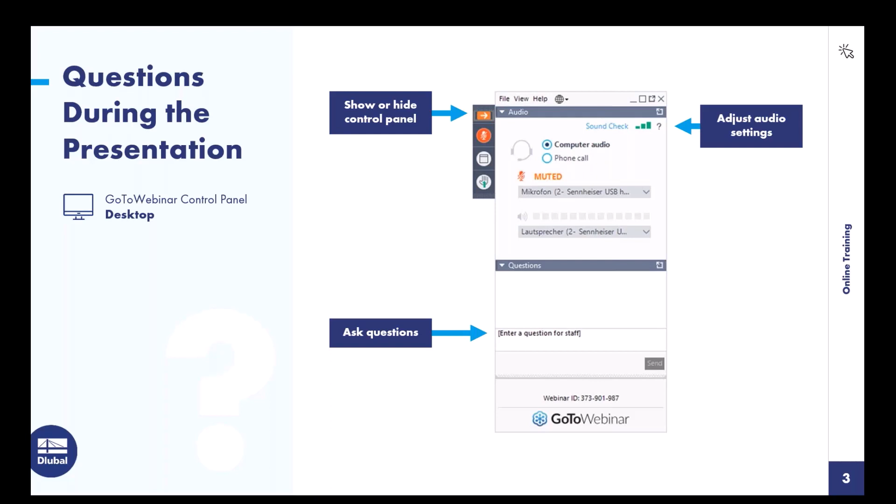I would now like to give you a brief overview of the training series. In today's training, you will receive an introduction to the strength of materials. This builds on the first training, which explained how internal forces are calculated. Today you will learn how cross-section values and stresses are calculated. In upcoming training courses, you will receive an introduction to finite element analysis and then an introduction to our design modules.

This brings me to today's training program. I will first give you an introduction to the RSECTION program. Using several examples, I would like to show you the modeling options and design methods in the program. On the first example, a thin-walled I-profile is modeled with graphic functions. I will model this slowly so you can enter this cross-section as well. In another example, I show how to insert cross-sections from the database and how you can add other parts to these cross-sections. Then I show modeling a massive cross-section based on a DXF template. Finally, I model a hybrid cross-section.

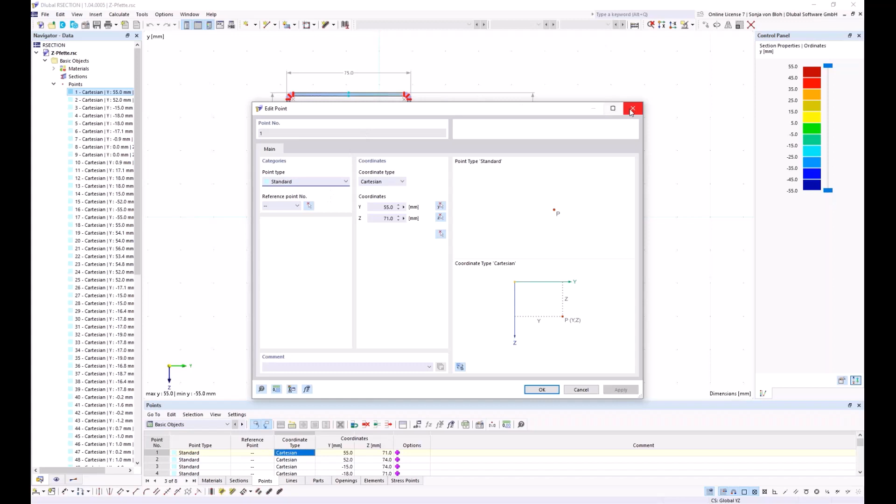It's also possible to open the dialogs for creating new objects. If I go to points, it's here possible to add a new point.

The display navigator, I will turn to this, controls the graphical display in the working window. If the checkbox in front of an entry is unchecked, this object is hidden in the graphic. If I uncheck the points here, you see in the graphic the points aren't displayed anymore.

The result navigator controls which results are displayed. You can change here between statical moments, unit stresses, and so on.

Then I would like to go into the mouse functions. To move the section, you can hold down the mouse wheel and move the section accordingly. You can turn the mouse wheel to zoom in or zoom out, and right-click opens the context menu.

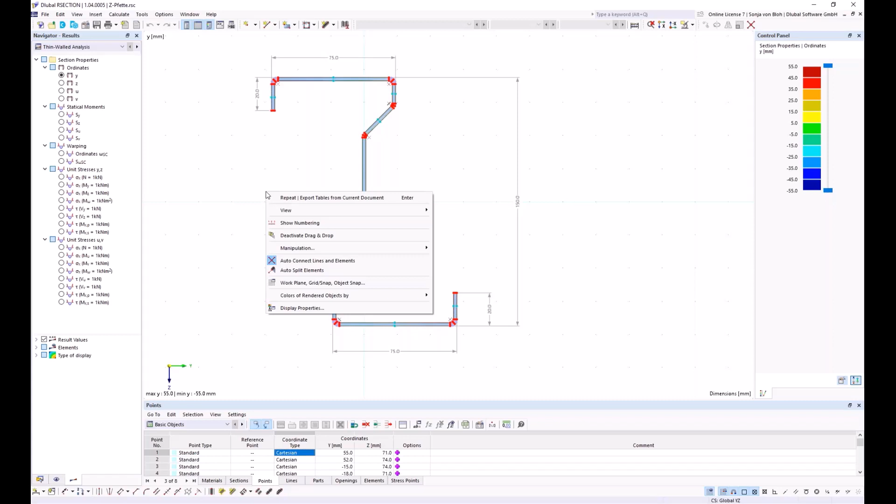You can also select objects with the mouse. If you open a window from left to right, everything that is completely within the selection area will be selected.

If you drag a window from right to left, everything that is intersected by the selection area will be selected. You can also select individual objects. To do this, left-click on an object that you want to select.

To add objects to the selection, hold down the Control key and then left-click on the next object you want to select. To remove objects from the selection, hold down the Shift key and click on the object you want to deselect. For the first part of the training, I am now starting a survey again.

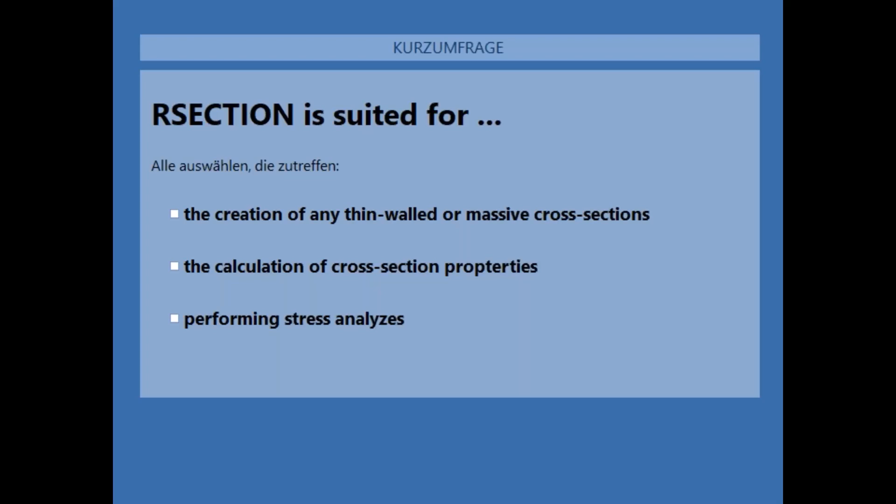All answers are correct. RSECTION is suited for the creation of any thin-walled or massive cross-section, and also for the calculation of cross-section properties and stresses.

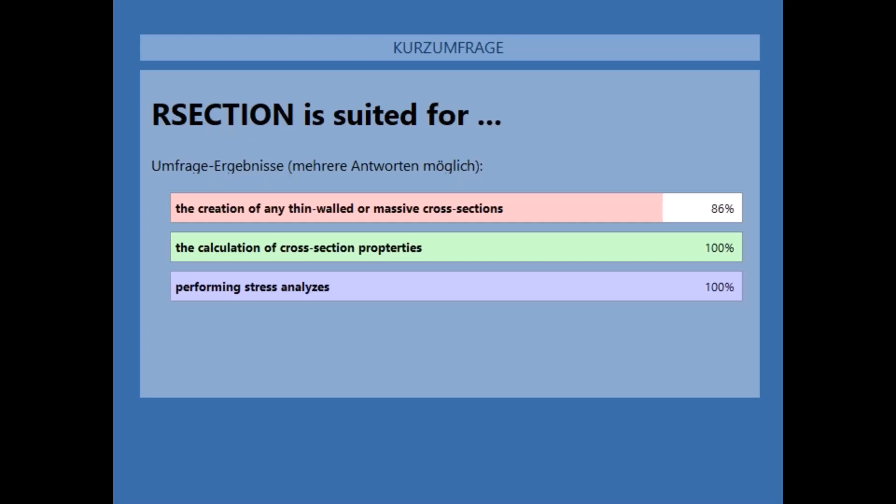This brings me to the first example. To create a custom cross-section, I open the new model window via this button here, and then I have to give the model a name, and I name it here example 1.

Furthermore, the analysis method must be defined. This is here in this chapter, and the following analysis methods are available: the finite element analysis and the thin-walled analysis.

The effective cross-section can be calculated for both analysis methods after activating the extension here under the options. A standard must be selected according to whose rules the individual parts, or the subpanels, are to be generated, and the effective cross-section is to be calculated.

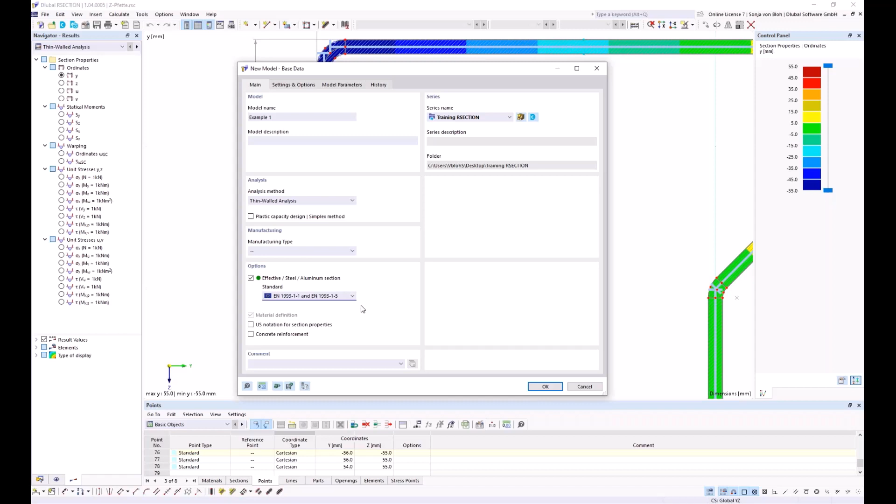The following standards are currently available: Eurocode 3 Part 1.1 for steel sections, Eurocode 3 Part 1.3 for cold formed sections, and Eurocode 9 for aluminum sections. I choose here the Eurocode 3 Part 1.1, and then I click on OK.

The selection of the design method or the standard is irrelevant when using the RSECTION cross-section in RFEM or RSTAB. You can select the design method in RFEM or RSTAB regardless of what is set in RSECTION. Furthermore, the subpanels are generated in the design modules based on the standard selected in the design add-on.

In the steel design add-on, the manufacturing type determines which part of the standard is used for the design. For cold formed cross-sections, the standard Eurocode 3 Part 1.3 is used, and for hot rolled or welded sections, the standard Eurocode 3 Part 1.1 is used.

Now the file is created. I first define the material, and for this I open the Edit Material window. I can create or copy another material on the list via this button. This creates a new material, and this copies the selected material.

I can enter a material name here directly. RSECTION then lists all materials that match that name. If I enter here S355, then RSECTION lists all materials with that name that are within this database.

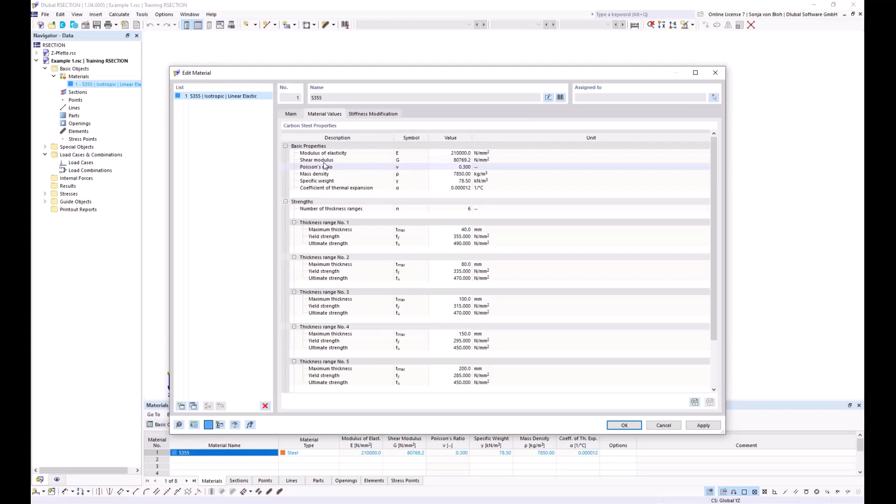If the material is not in the material library, I can create this material by activating the user-defined material option. I can adjust the material values of this type of material if I want to. I don't want to do this today, so I uncheck this option again. Then I click on OK.

I then create the elements. The definition of elements is required if the analysis method, analysis of thin-walled structures, is selected, or if the effective cross-section is to be calculated.

An element must always lie in an area. This area is called part in RSECTION. Elements can be created graphically or via a dialog.

The graphical input is called up via the symbol here in the toolbar, and the input via dialog is called up via the navigator data. If I go here, I can create a new element via the dialog.

When creating an element with graphical input, the part is also created. When creating an element via the dialog box, the parts and the points of the element must be created beforehand. This is why it's not possible here to call up this dialog, because I haven't created the points before.

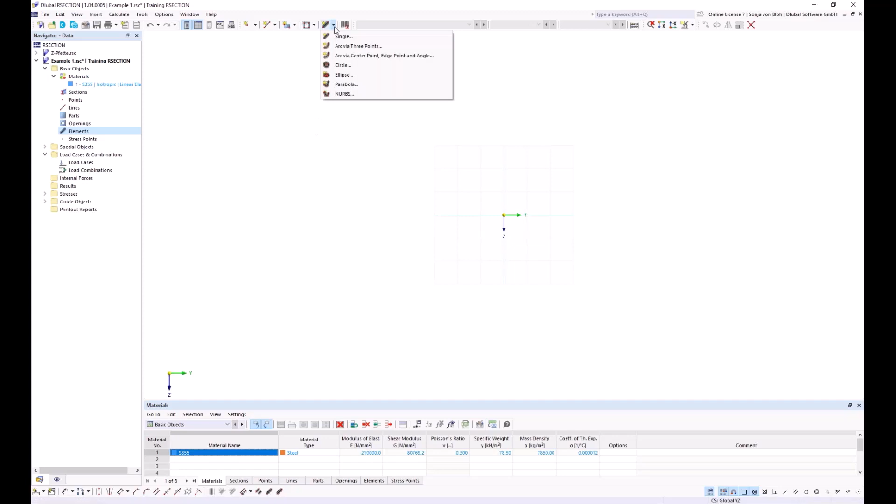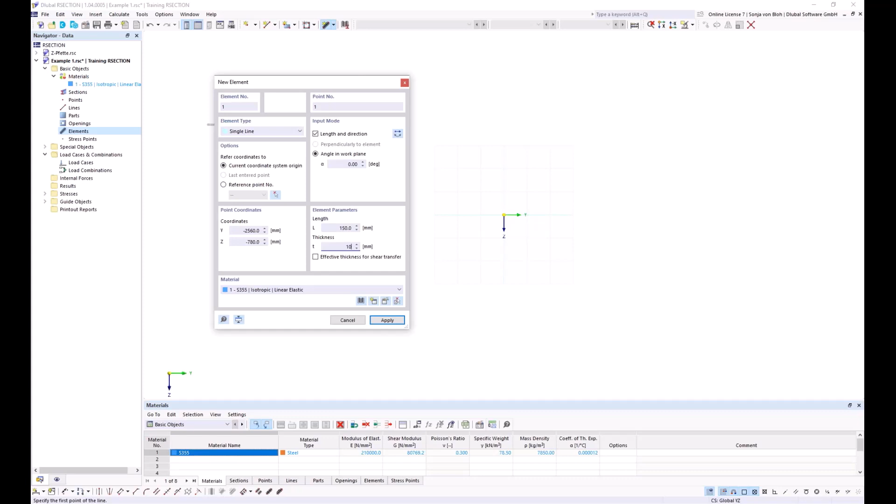I enter the element graphically, so I use this function single, and I enter the bottom flange here first. I choose the input mode length and direction, and I choose an angle on the work plane of 0 degrees, and I define for the flange a length of 150 millimeters and a thickness of 10.7 millimeters. Then I left-click here on the working window.

Then I create the web. Elements must be connected for the calculation of the effective cross-section. The connection is made via the start and end points of the elements. If two elements share the same points, they are connected.

For the web, I use the input mode length and direction, and define an angle in the work plane of about 90 degrees. I change the direction, then define the length of 289.3 millimeters and a thickness of 7.1 millimeters.

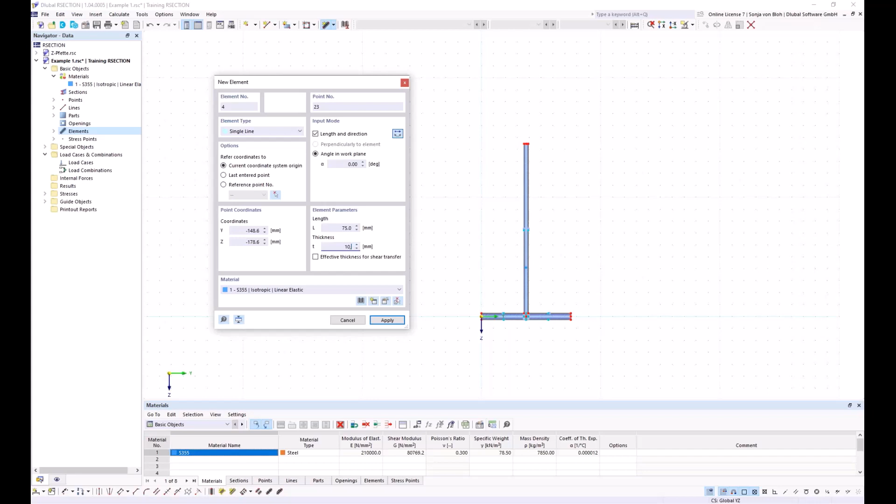I create this web. Then I create the left flange, also using the input mode length and direction. I change the angle on the work plane to 0 degrees, the length to 75 millimeters, and the thickness to 10.7 millimeters.

Now I have to create the flange on the right side. For this I reverse the direction, and then create this element. I now click on the right mouse button to close my window.

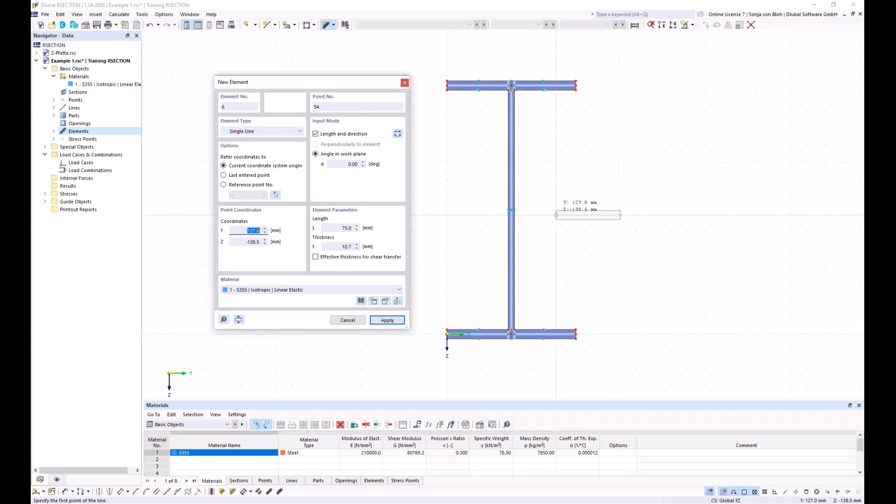The profile should be a rolled T profile to which a lower flange is welded. The round radius is 15 millimeters.

I can define lines to create them, or use the create round corner function, which I find here below. In this dialog I have to define the round radius, which should be 15 millimeters, and then click on the corresponding lines.

Then I click on the right mouse button to close this window. The lower flange is welded with a 6 millimeter double fillet weld.

I create the welds using the create angled corner function, which I find here. There are two corner types: both edges, where I can define the length of the edges, or edge and angle, where I can define just one length and an angle. You can also calculate directly in the dialog.

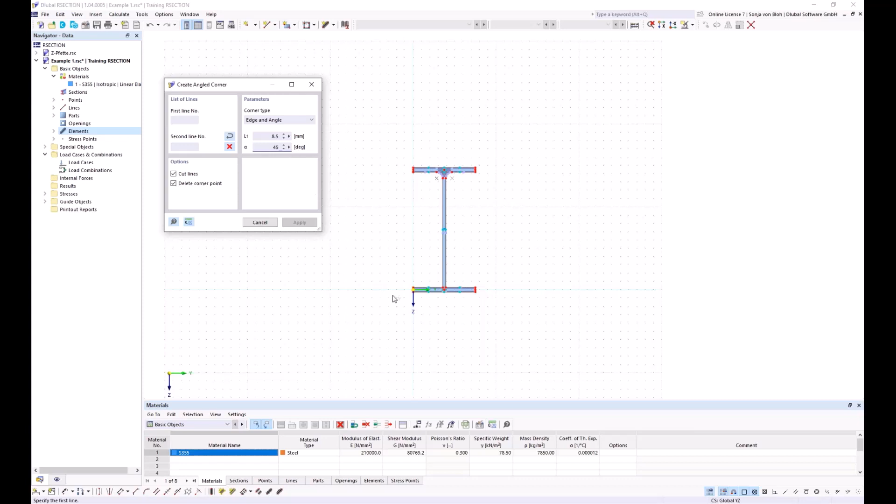So I define 6 multiplied by the square root of 2, and define an angle of about 45 degrees, and then click on the corresponding lines.

The subpanels you can see here are generated based on the standard selected in the base data; these cannot be changed. If no elements are defined, cross-section classification in the design modules of RFEM and RSTAB is not possible, and neither is a calculation of the effective cross-section. In the design add-ons, this cross-section is then designed according to cross-section class 3.

I would also like to use this example to show you how to calculate stresses and the effective cross-section. In order to calculate stresses or the effective cross-section, a load case must first be created. Load combinations can also be formed.

I create a load case first by going into the navigator data, right-clicking, and choosing new load case, which I name N. I want to create a second load case using this button, create new load case, and name it M. I also want to define a load combination.

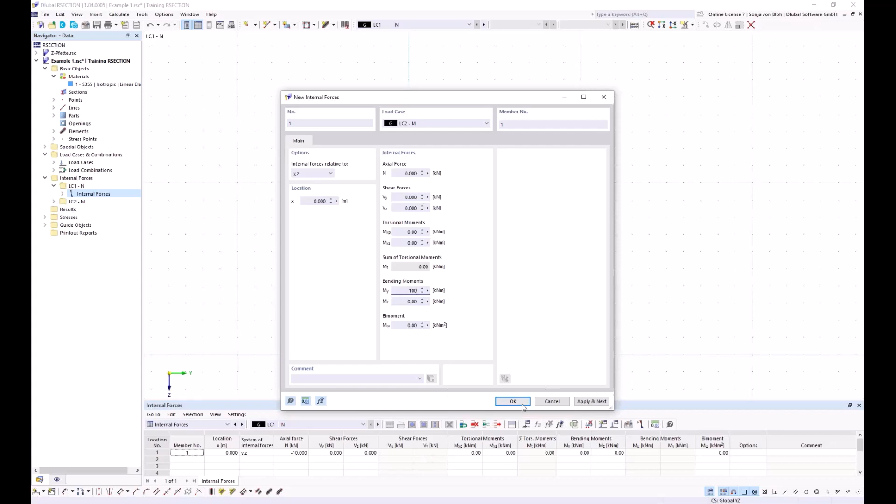And I click here on OK. The blue dots that you can see here on the graphic are the stress points. Stresses are calculated and displayed at the stress points. The stress points are generated automatically, but they can also be defined manually. I want to do that here.

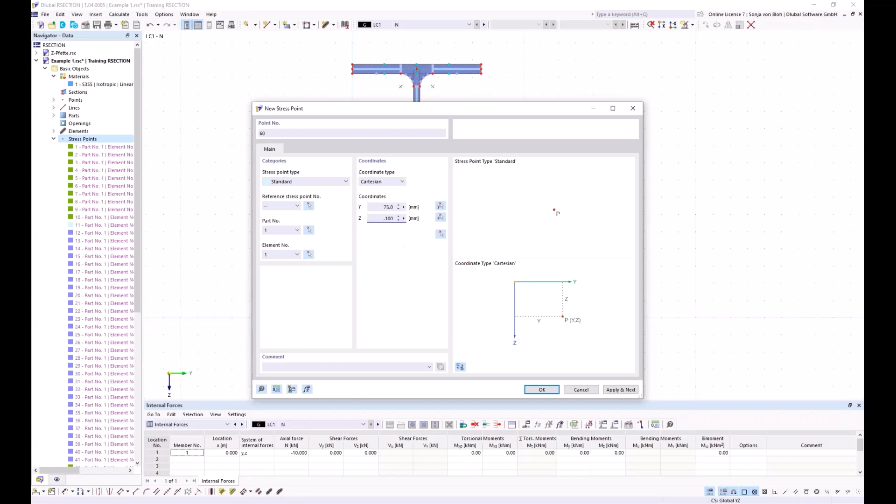So I go here to the navigator data again. I find here the stress points, right click on it, and define a new stress point. It's possible to define the coordinates manually, or to select a point in the graphic and import its coordinates. I define for the Y direction 75 millimeters, and for the Z direction -100 millimeters, then click OK. This stress point is now created. If I want to find it, I can right-click on the stress point in the navigator data and use the function find, and you see now the stress point is located here.

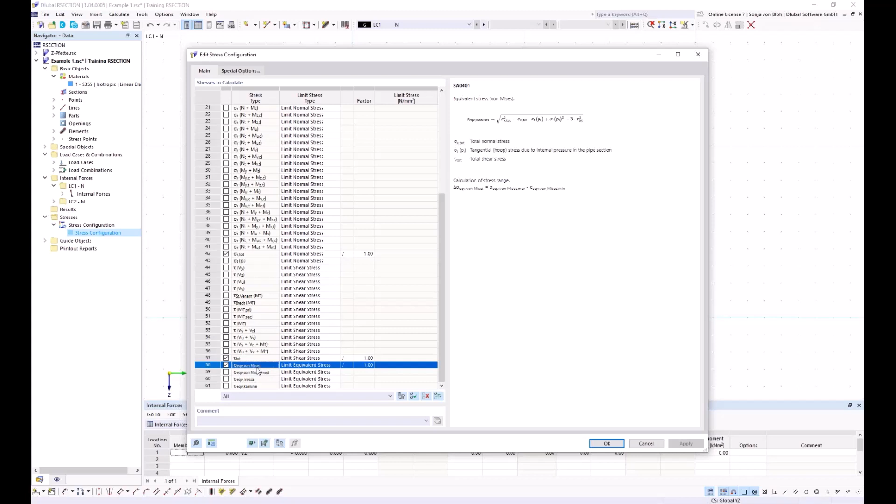Which stresses are to be calculated and output in tabular and graphical form can be set in the stress configuration, found also in the navigator data under stresses, stress configuration. If you double click on it, the corresponding window will open, and via these checkboxes you can check or uncheck the stresses you want to calculate. Here these stresses are calculated: the total normal stress, the total shear stress, and also the equivalent stress. I don't want to calculate more stresses, so I click on OK.

I'll start the calculation now. For this, I choose here in the menu Calculate All.

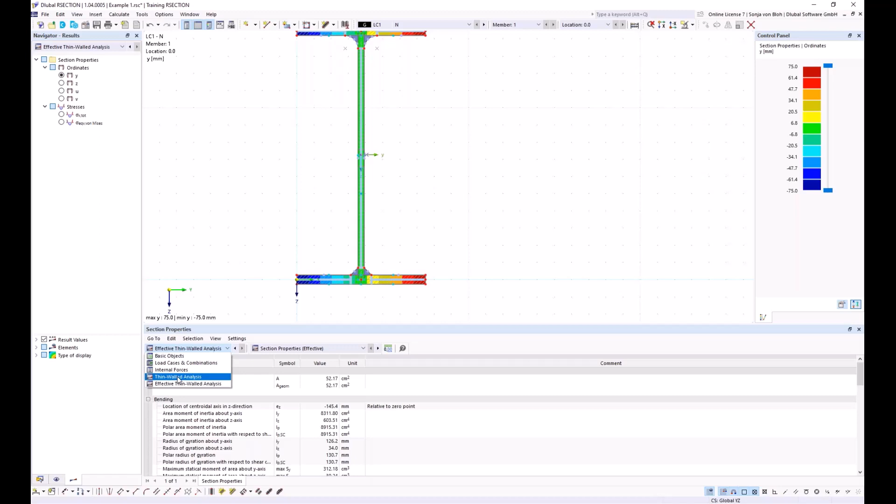In the result navigator, you can switch between the gross cross-section, this is here the thin-walled analysis, and the effective cross-section, this is here the effective thin-walled analysis. The same is possible in the result tables, where you can also switch between thin-walled analysis and effective thin-walled analysis. Furthermore, you can switch between the results of the individual load cases, and you can also display the stresses. Now the stresses sigma x total are shown for load case number 1. If you want to see the stresses for load case 2, you have to choose that load case here.

I first look at the results of the gross cross-section of load case N. The display type can also be set on the results navigator. Here you can change the type of display. I change here, I choose off. I can see the cross-section values here for the gross cross-section.

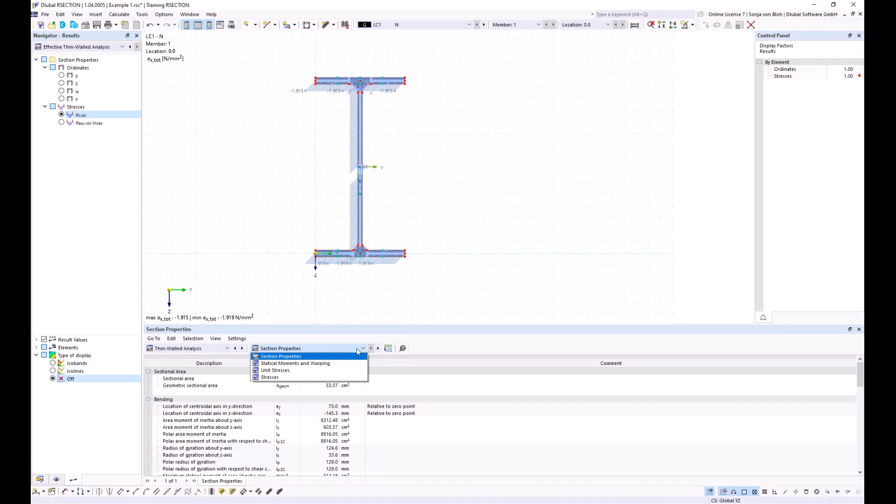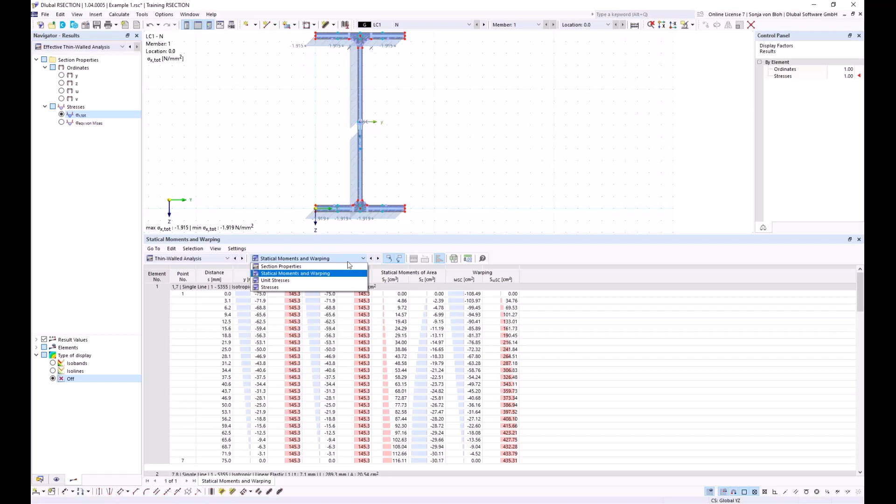If I choose here thin-walled analysis, then you can see the section properties. The section area is calculated, also the area moment of inertia about Y and Z axis, and so on. Also you can see here in the tables the statical moments, and it's possible to see the calculated stresses numerically. It's also possible to show these results graphically. You can see here the statical moments, and also the stresses on the gross section.

If I now want to display the stresses at a specific stress point, I have to switch here to the tab All Stresses by Stress Points. And if I choose here this stress point that I have created manually, then the results of the stress point are displayed here on the table.

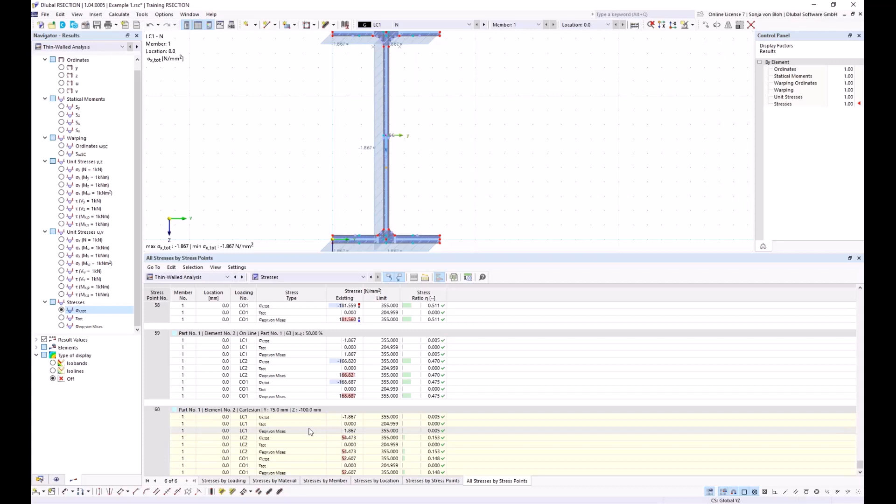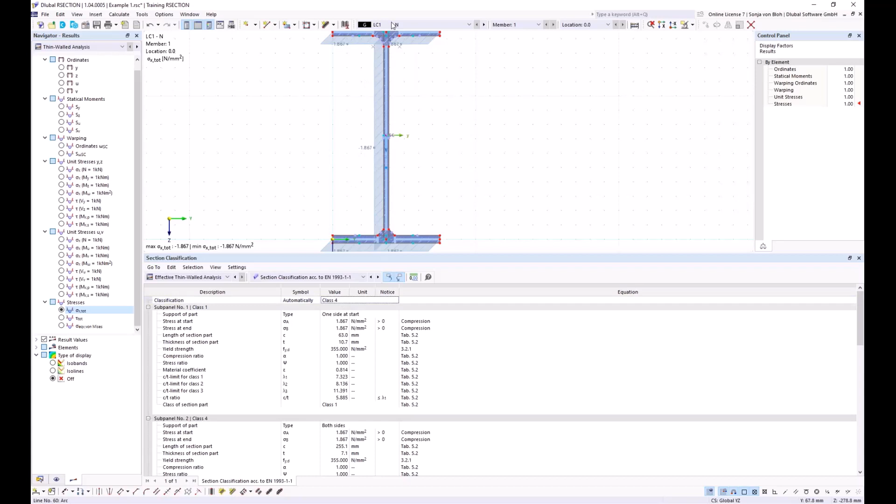In the case of the results of the effective cross-section, in addition to the results of the gross cross-section, there are also outputs for the classification of the cross-section and the effective width of the cross-section. I choose here the effective thin wall analysis. I have here the section properties of the effective cross-section, and here the section classification, and I see that the section falls into class 4 for this load case, axial force.

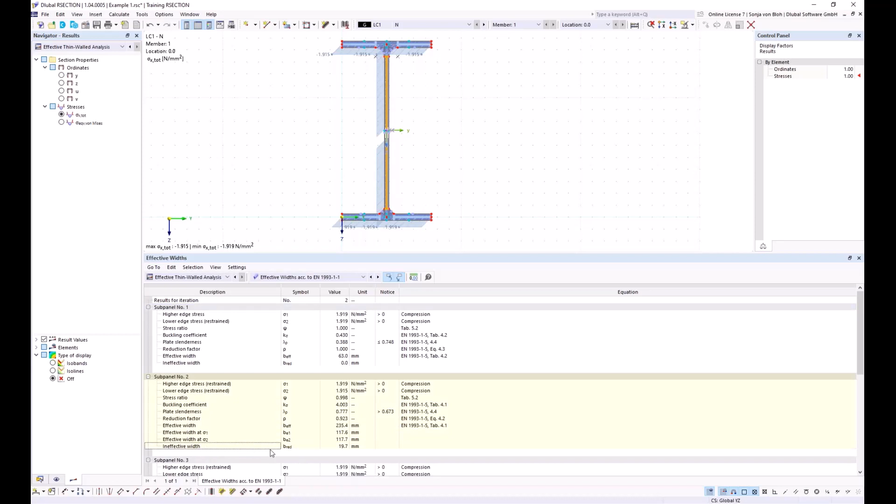Local buckling occurs in class 4 cross sections. According to the standard, the reduction in strength due to local buckling can be taken into account through effective widths, and you can see this here in the graphic. If I change here to effective thin walled cross section, then here the web falls into class 4, and therefore the effective widths are calculated. Here an ineffective width is calculated of about 19.7 millimeters, and you can see this reduction graphically.

It's also possible to look at the results of my load case 2. Then you can see that for my load case 2, this cross section falls into class 1, so no reduction is made.

I'm now starting a survey again regarding the requirements for cross-section classification. I start this. Multiple selection is also possible.

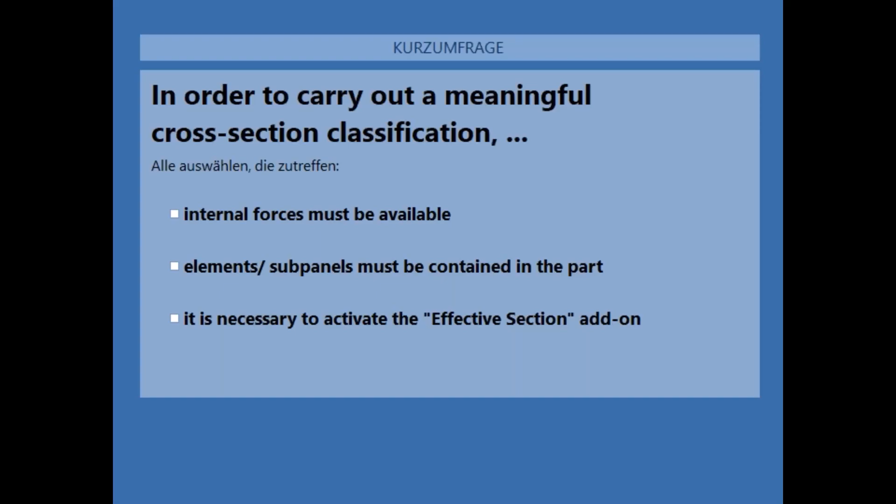Okay, I close the survey and then I share the results. All answers are correct. For a classification, internal forces must be defined, elements must be defined, and it's necessary to activate the effective section add-on.

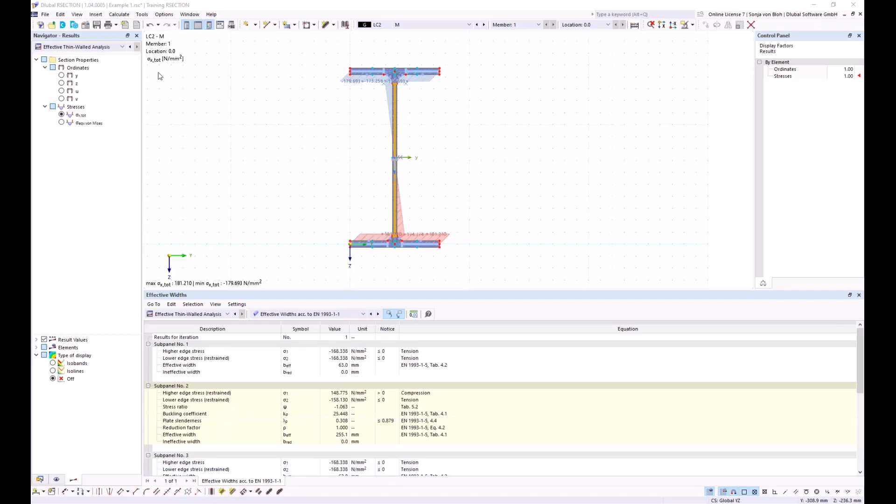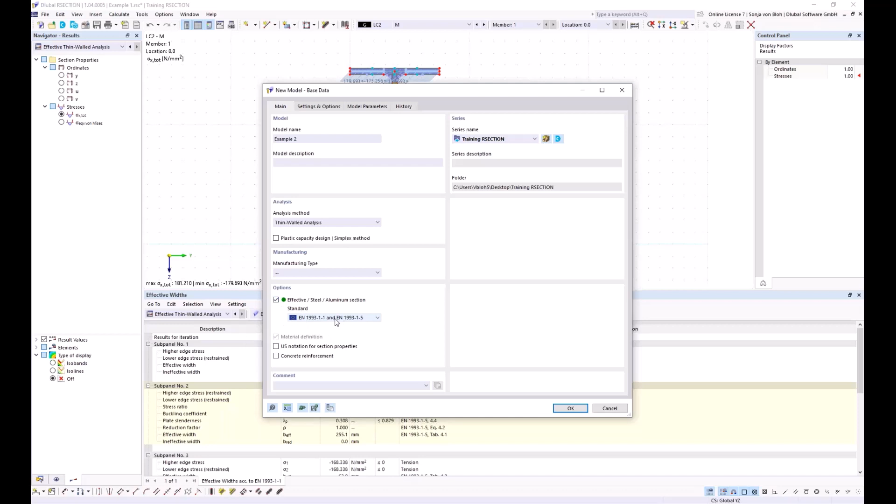I would now like to use another example to show you how you can access cross-sections from the library and modify them. For this, I create a new file. I click here on this button, New File, and I name it Example 2. I choose here the analysis method, thin-walled analysis, and I want to calculate also the effective cross-section. So I activate this checkbox again, and I choose here the Eurocode 3 Part 1.1. Then I click on OK.

Then I define the material. For this, I double-click on the material and I open the material database. And here I choose this S235. And here I click on OK. And now this material is defined.

And then I insert a cross-section from the cross-section library. To do this, I open here the new section and window in the data navigator. The window is structured like the material window. A cross-section can be created or copied via the list here. You can create a new section or you can copy selected sections.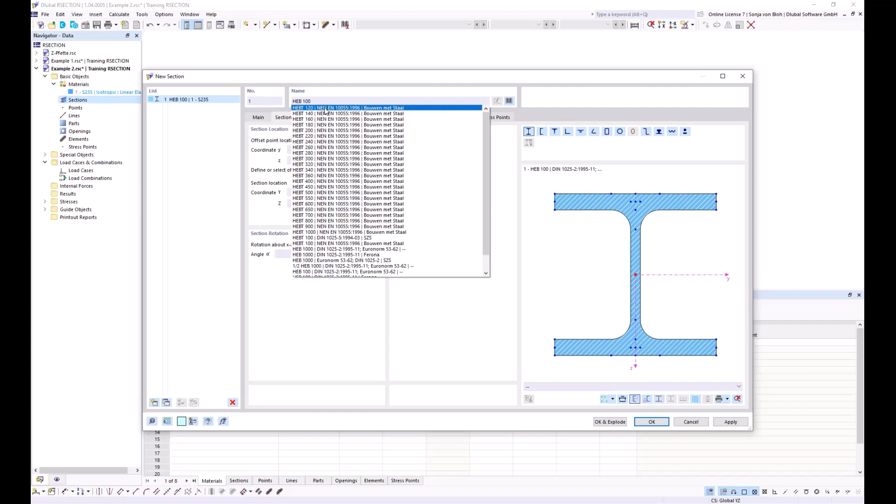I can also enter the name directly here, maybe HEB 100, and then you can see here all cross sections with that name in the cross section library. I can also open the cross-section library via this button here. A large number of cross-sections have already been entered into the cross-section library.

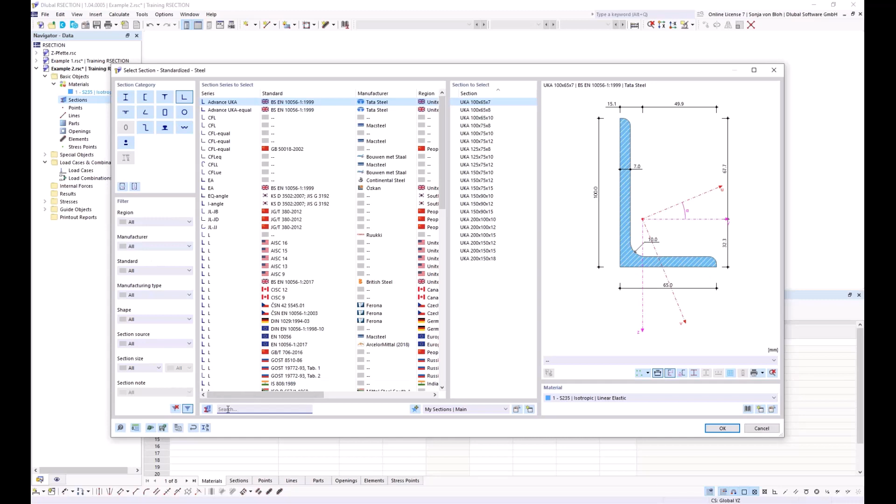I choose here standardized L cross-section. And in the cross-section library, like in the material library, I have filters here on the left or a search to quickly find the cross-section. I choose here an angle L 200 x 150 x 12, and I choose here this standard from DIN, and then I click here on OK.

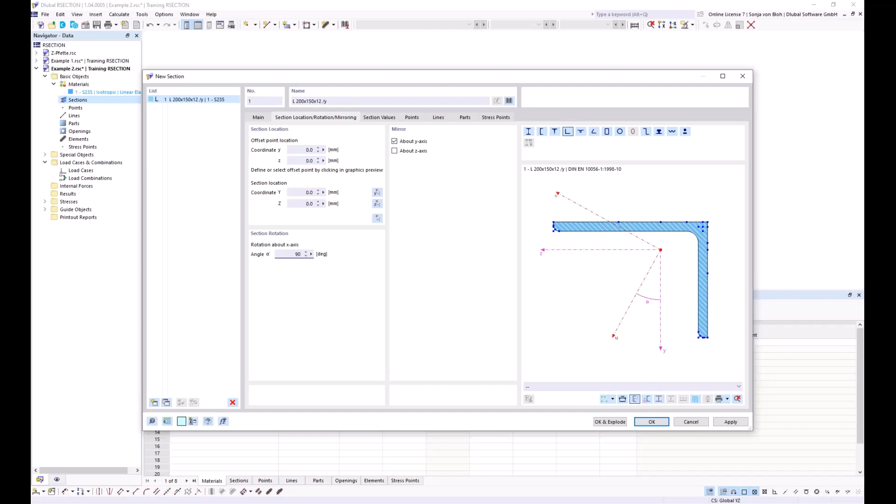The angle should be mirrored around the y-axis. That's why I activate this checkbox, and the angle should be also rotated about the x-axis about 90 degrees. So I define here 90 degrees. Furthermore, I select the offset point in the graphic, and here I select this point, and at this point the cross section is placed at the insertion point that you can enter here. You can enter it manually, or it's also possible to pick the location in the working window. And I pick here this location, and then I click on OK.

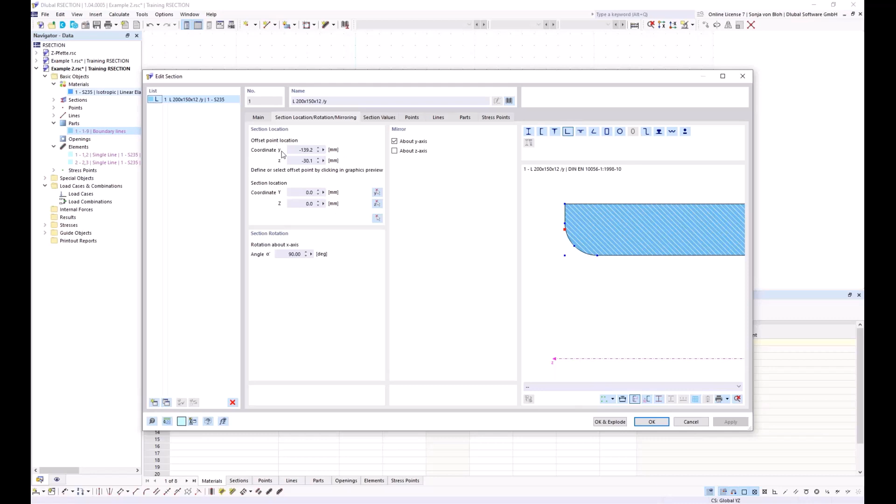When inserting this thin-walled cross-section, two elements are created, and also the corresponding part. The cross-section can be subsequently edited. If I double-click here, this opens the Edit Section dialog where I can change or modify here the offset point locations and so on. And it's also possible to move this cross-section or to rotate this cross-section via this function here.

However, in order to modify individual objects such as points or lines, the cross-section must be split. The cross-section is to be supplemented by further cross-section parts. I therefore split the cross-section into its individual parts, and I can do this by right-clicking on the section, and then I choose here this function explode.

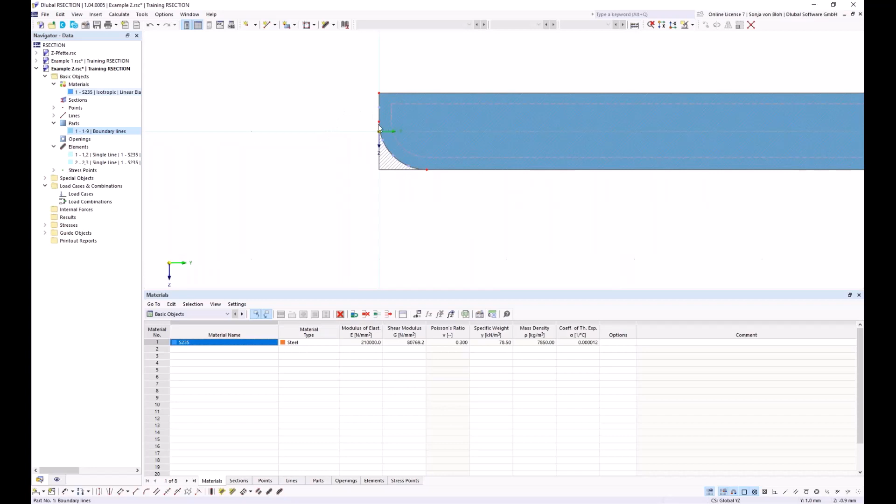The fillet isn't needed, so I will delete that. I delete this point, and now the part is deleted too. Here you can see the elements are colored in red, and this means there's an error for this element. The elements must lie in a part. The part is deleted, so here's an error, but I will create this part later.

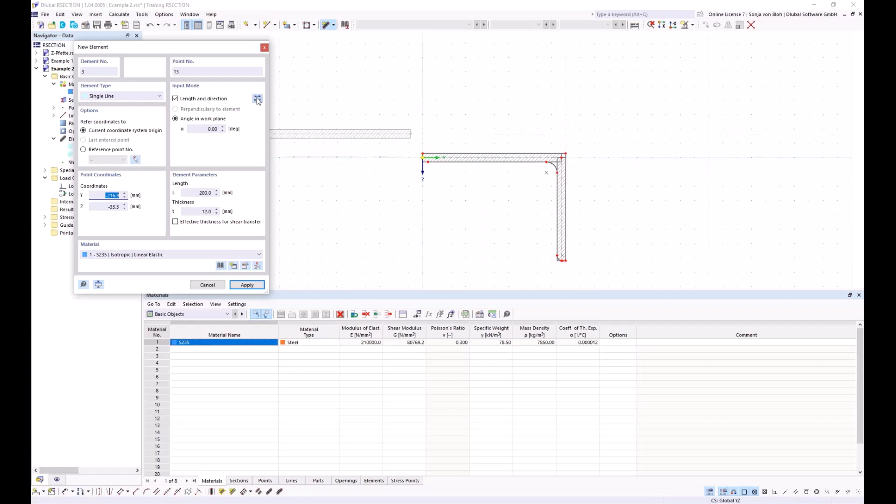I will now add more elements, and I will do this via the graphical input. So I select here a single element, and I use also the input mode length and direction. Angle in the work plane is 0 degrees, and I define here a length of 200 millimeters and a thickness of 12 millimeters. Now the direction must be changed, so I click here on reverse orientation, and then I click here on this point. Another element for the web should be created.

To do this, I use also the input mode length and direction. Here I define an angle of 90 degrees, and I have to reverse the orientation, and the length should be 400 millimeters and the thickness 10 millimeters. And then I click here on this point.

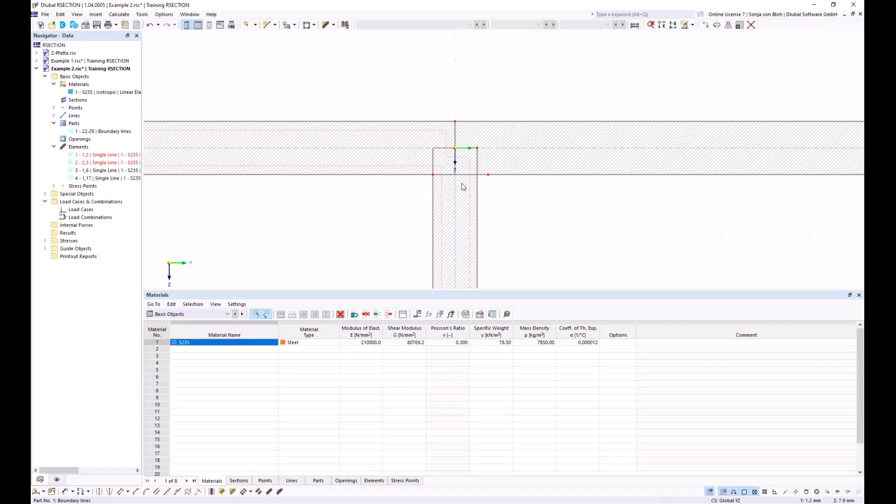I delete unnecessary lines. For this, I click with my left mouse button on this line, and then I click on delete. And I will do this with this line also. I select it, then I click on delete.

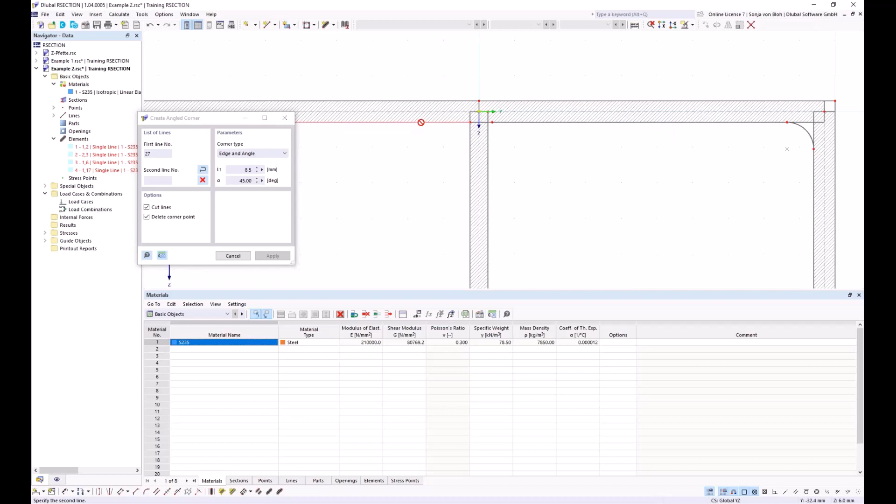Welding seams should be also taken into account in the cross-section properties. I create the weld using the angled corner function. So I open this dialog again. I choose the corner type, edge and angle, and a 6 millimeter double fillet weld is to be defined, so that I define here 6 multiplied by square root of 2, and I define here an angle of about 45 degrees, and then I click on the corresponding lines.

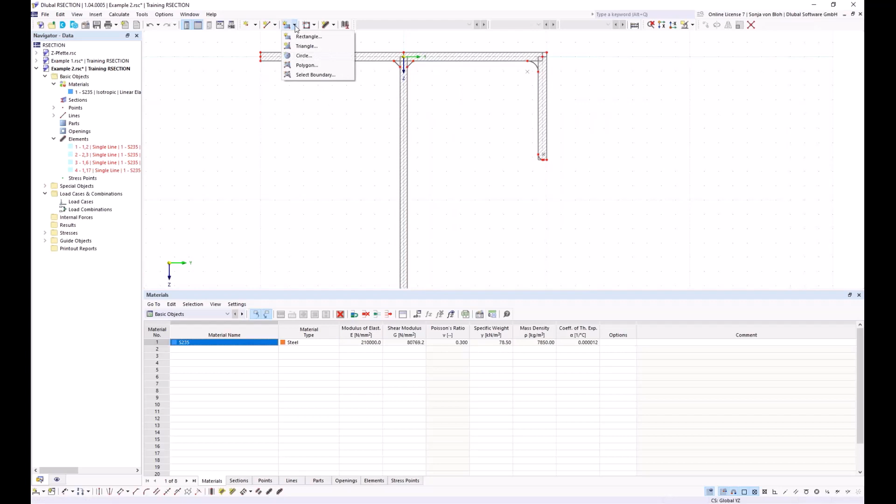Furthermore, I still have to create the part, and I will do this using a function that I can find here: select boundary. For the new part, I have to define a material. This should be the created material, S235. Then I click OK, click on a line, and now the part is created. The cross section is now complete.

I would now like to calculate the effective cross section and the stresses, so I create load cases and internal forces. I create the load cases first. For this, I go to the navigator data and choose new load case. I name this load case N, and I create another load case via this button, create new load case, and name it load case M.

I also create a load combination. For this, I go to the tab load combinations, click on create new load combination, and then I add all load cases to my load combination. Then I click on OK.

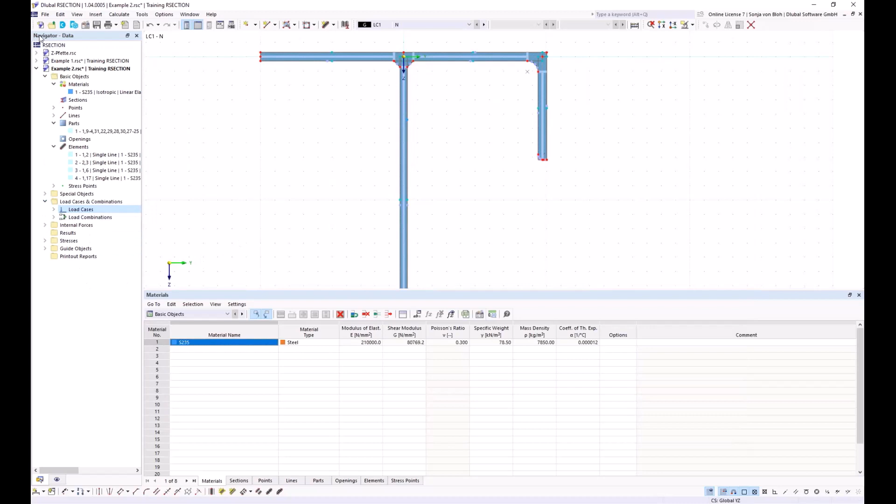Then I have to define the internal forces. To do this, I go to the navigator data, open internal forces, and then I define here an axial force of minus 50 kilonewton. I click on apply and next.

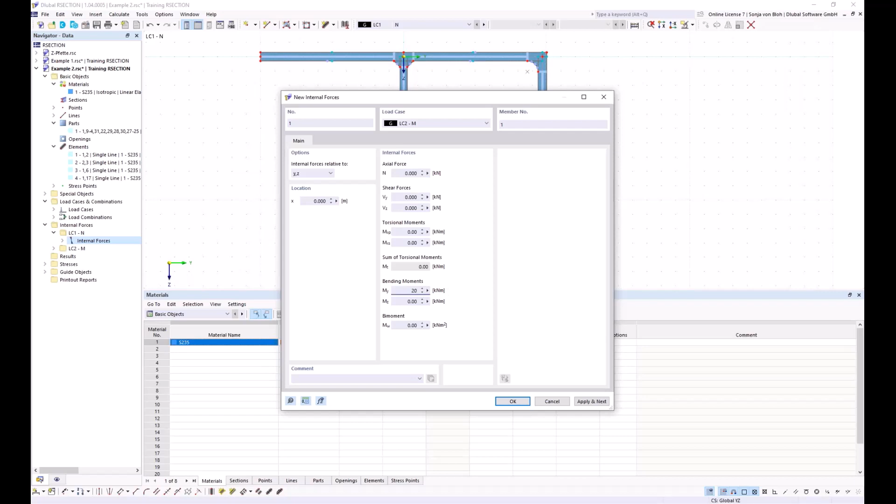I change the load case to load case 2. I define here an axial force of 0 kilonewton and a bending moment of 20 kilonewton meter. And then I click on OK.

Then I start the calculation. I choose calculate all, and I look at my effective cross-section. This cross-section falls in load case 1, also in class 4. I can see the reduction here, and I can see the reduction also in the tables. I can see the section classification, class 4, and the effective width for this sub-panel.

I also want to create a printout report, and I will do this via the navigator data, where you find printout reports. Then I click on new printout report, and I have to check the report items that I want to add into my printout report. I don't want to see the stresses by material, by member or location, and stress points. Then I click on Save and Show.

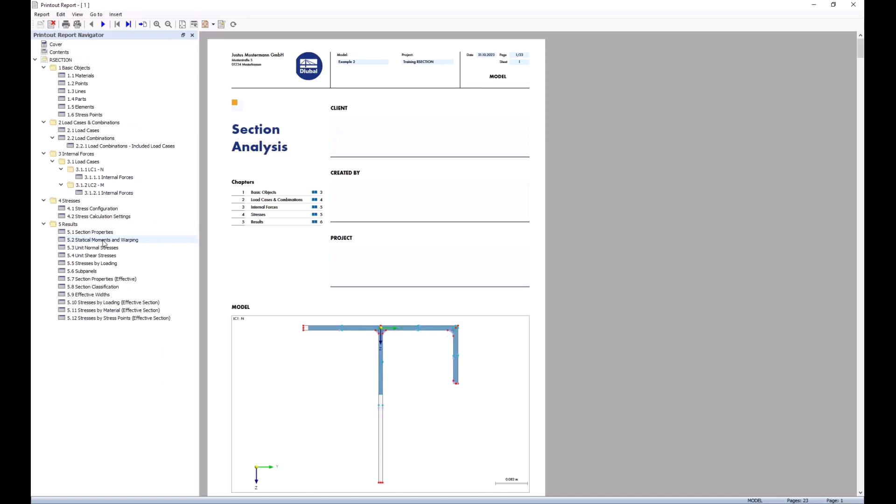Now the printout report will be created. I can see here the numerical results. It's also possible to add graphics to the printout report.

To do this, I hide this printout report, and I use this function, print graphics to the printout report. In this window, it's possible to define the size of the graphic. Here I choose window filling. I can see now the preview, and if it's okay, I can click on Save and Show. Now this graphic is added to the printout report.

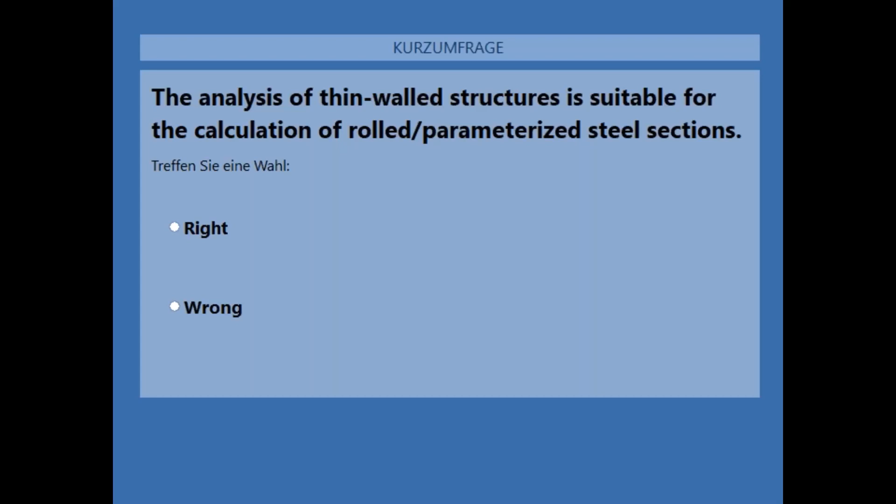I will now close the survey and share the results. The correct answer is that the analysis of thin-walled structures is suitable for the calculation of rolled/parameterized steel sections, and you have answered this correctly.

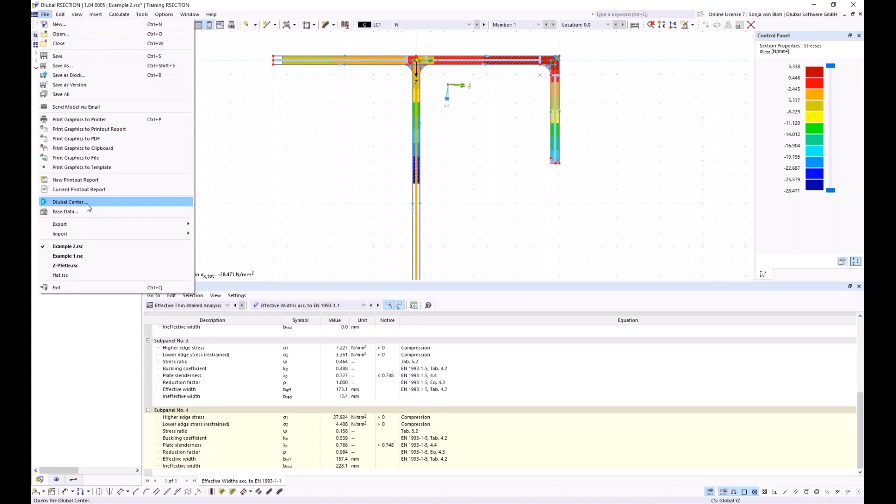In the next example, I would like to show you that you can also create cross-sections by importing a DXF file. A DXF file can be imported via menu File, Import DXF. Then I have to choose the corresponding DXF file, and then I click here on Open.

I don't want to import the DXF file into the active model. I want to create a new one, so I click on No. And then a new window opens.

In the section Create RSECTION Model, you have 3 options for creating the cross-section. The automatic creation of elements is useful if the outlines of the cross-sections are available in the DXF file. RSECTION attempts to create center lines for parallel lines and then set the elements between the intersections. Only elements that do not exceed the maximum thickness that you can define here are created.

The import function, use DXF template lines as center lines, is useful if the cross-section geometry is available as a center line model. The lines of the DXF template are considered as the center lines of the elements. The thickness defined in the field T is assigned equally to all elements.

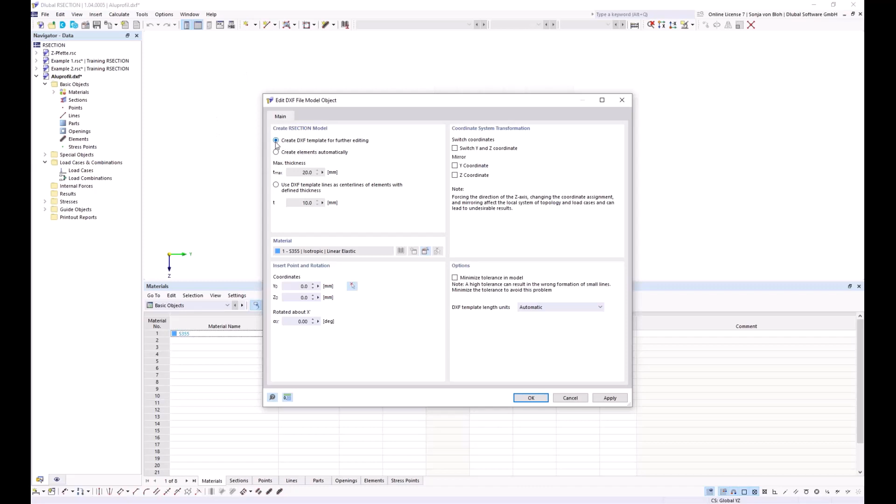You can then use these lines as an aid for modeling. I choose this option now, and then I click on OK, and now the lines are created.

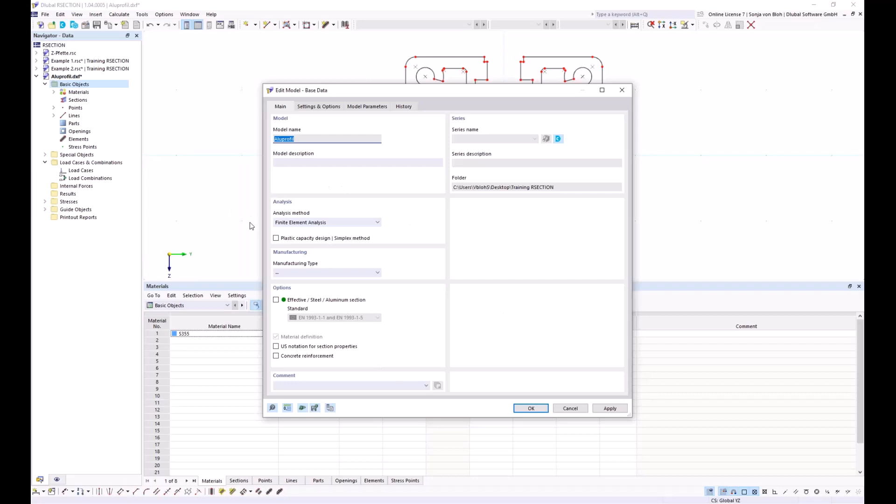A finite element analysis is to be carried out. To do this, I go to the base data and choose the analysis method, finite element analysis. The finite element analysis should be performed on massive cross-sections, such as timber or concrete cross-sections, in contrast to thin-walled cross-sections, where stresses can be regarded as constant across the cross-section thickness. The stress distribution in solid cross-sections is variable, and this can only be determined with a finite element analysis. So I choose this analysis method now, and click on OK.

Then I have to define the material. I modify the created material. This should be an aluminum material. I open the material library, change the filter to aluminum, and use the search function to define a material, EN AW-6060. I choose this material here at the bottom, and then click on OK.

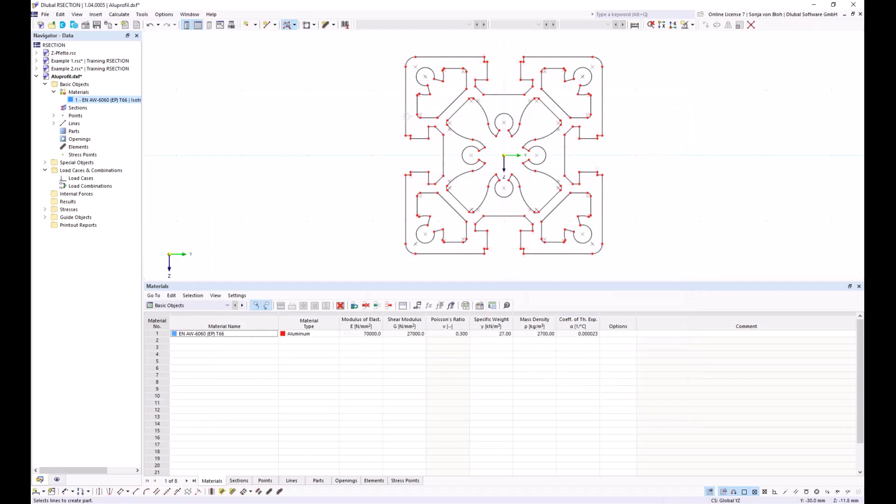In a finite element analysis, only a surface needs to be defined, meaning only the part needs to be defined, but no elements. I would only need to define elements if I also want to calculate the effective cross-section or carry out a classification. So I only have to create the part here, and I create this part via the function select boundary. I click on OK, and then click on a boundary line. Now the part is created.

I still need to create the openings. I create the openings using a function I find here, select boundary, and then I have to click on the boundary. I can create the other openings by rotating them.

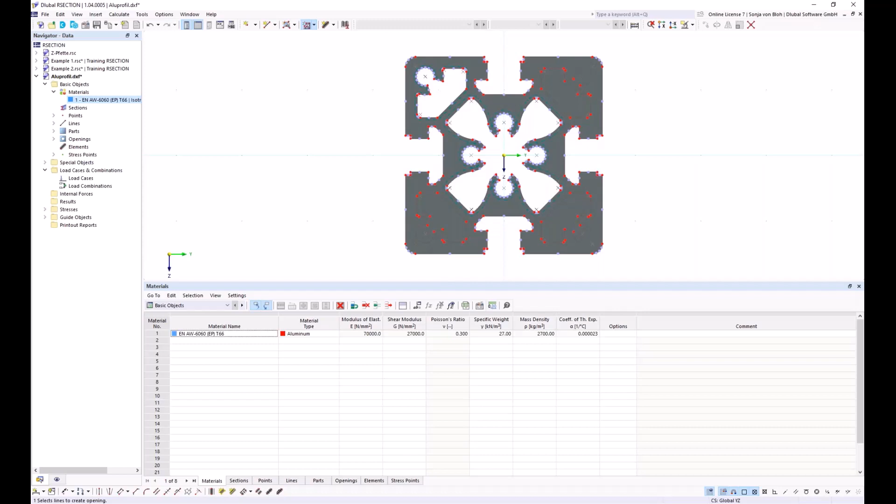I want to show you this also. First I have to select the opening that I want to rotate, and then select the function rotate selected objects. I want to create a copy, and I want to create 3 copies. That's why I define a number of steps of 3, and the rotation angle should be 90 degrees. Then I have to define the point of rotation, which I can also pick in the window. If I click now on OK, the openings will be created.

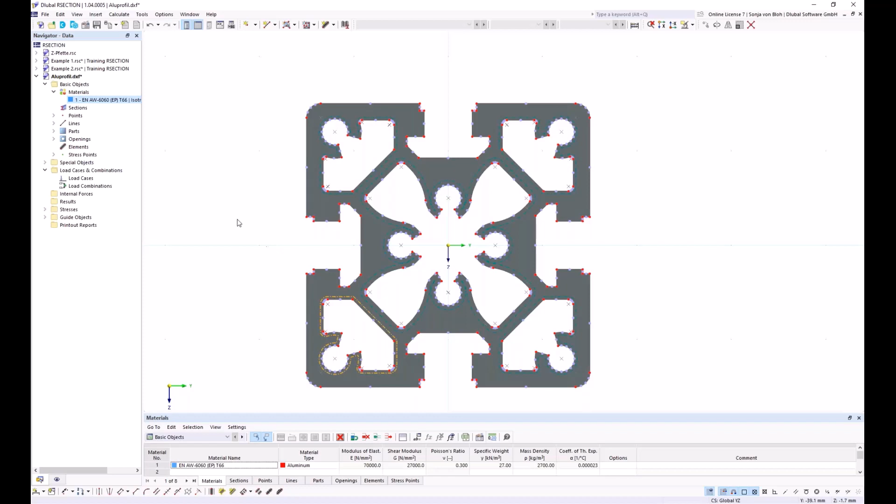I want to calculate the stresses here as well, so I create load cases. For this, I go to the navigator data again, right click and choose new load case. I define a load case N, and I also define a load case MT. Then I click on OK.

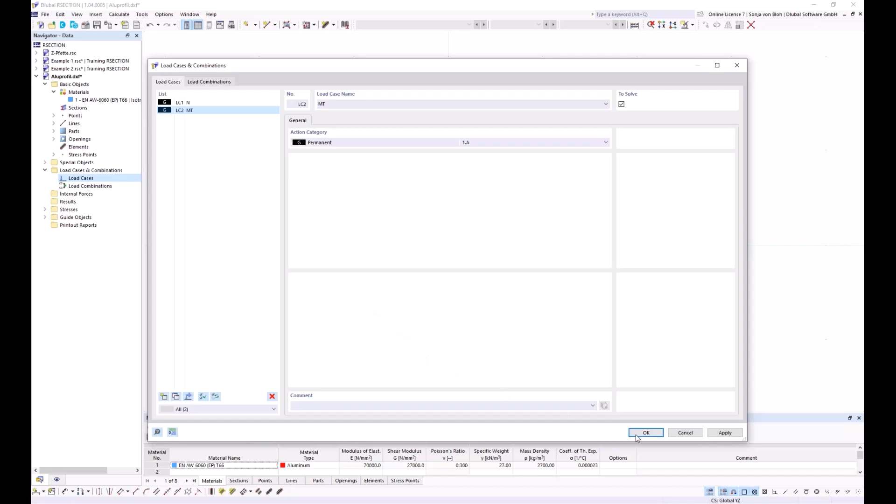Then I define the internal forces, again via the navigator data. I open the internal forces dialog and define an axial force of about minus 10 kilonewton in load case 1. Click on apply and next. Then I go to load case 2, and here I define a torsional moment of about 0.3 kilonewton meter. And click here on OK.

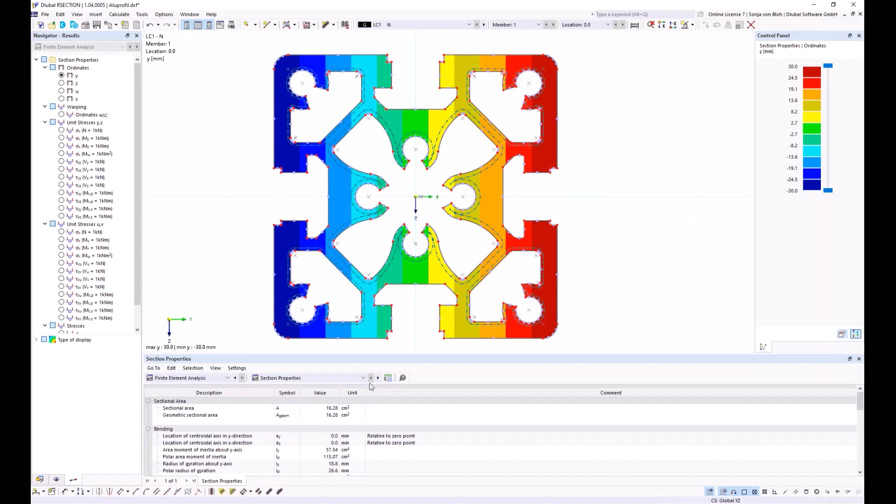Then I start the calculation via menu calculate all, and now the finite element analysis is carried out. I have the section properties, the stresses in tabular form, and I can also see the stresses graphically. If I choose, for example, sigma x or tau total, I have to change to load case number 2, and you see it now, the results graphically.

I want to create for this also a printout report. That's why I go to navigator data again, right click on printout report, and choose new printout report. Here I choose the report items. I don't want to see the stresses by material, member, location, stress points, and so on. Then I click on Save and Show, and the printout report is generated.

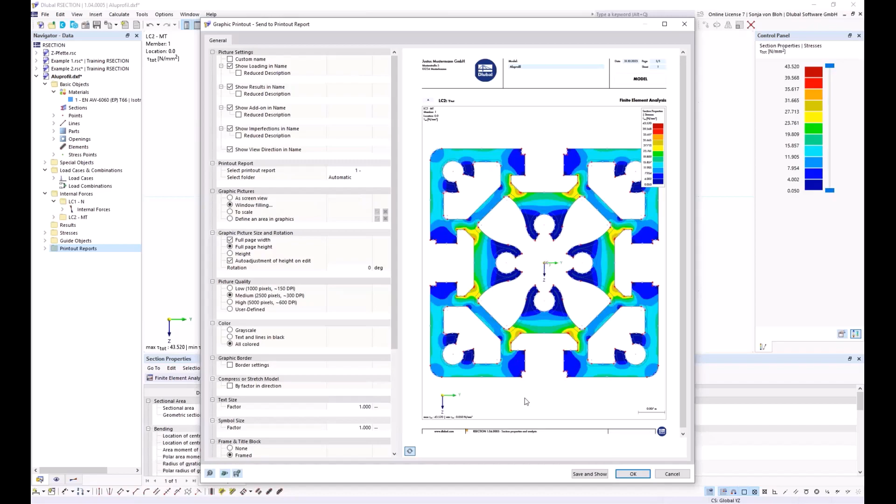I want to also add a graphic to this printout report. So I go to this function, print graphics to printout report. This should be window filling. Then I click on Save and Show, and now this graphic is also added to the printout report.

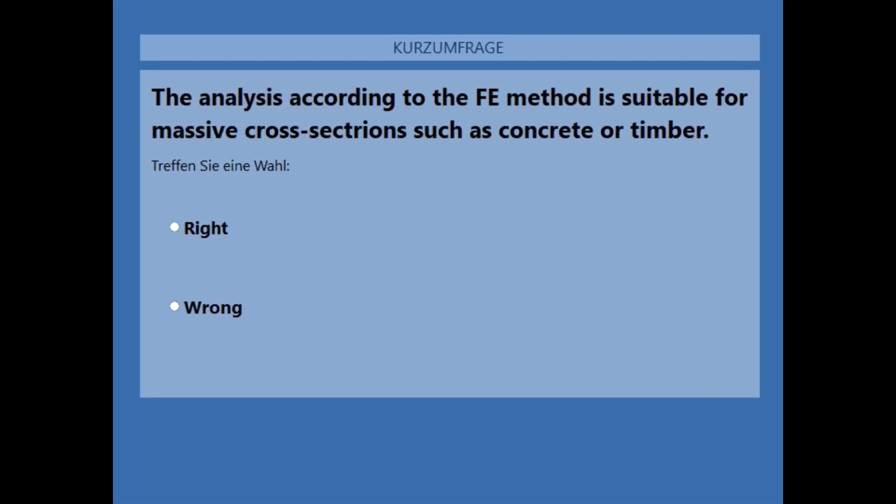Nearly all of you have answered this question, so I share the results. The correct answer is that the finite element method is suitable for the calculation of massive cross-sections. Most of you gave the correct answer.

As a last example, I show the modeling of a composite cross-section. In RSECTION, it's also possible to model cross-sections that consist of different materials. Ideal cross-section values are determined for such a cross-section. A 1000 millimeter wide and 200 millimeter high concrete cross-section lying on an HEB steel cross-section is modeled in this example.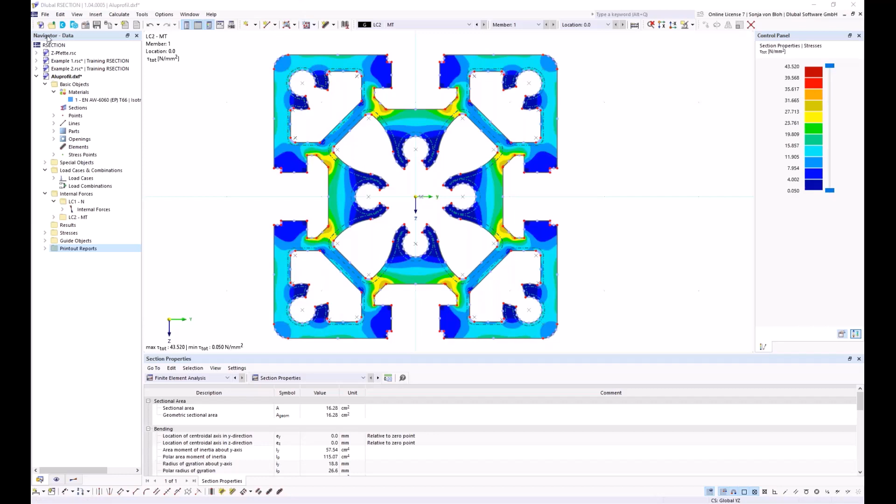For this, I create a new file and name it example 4. I choose the analysis method finite element analysis, and then I click OK.

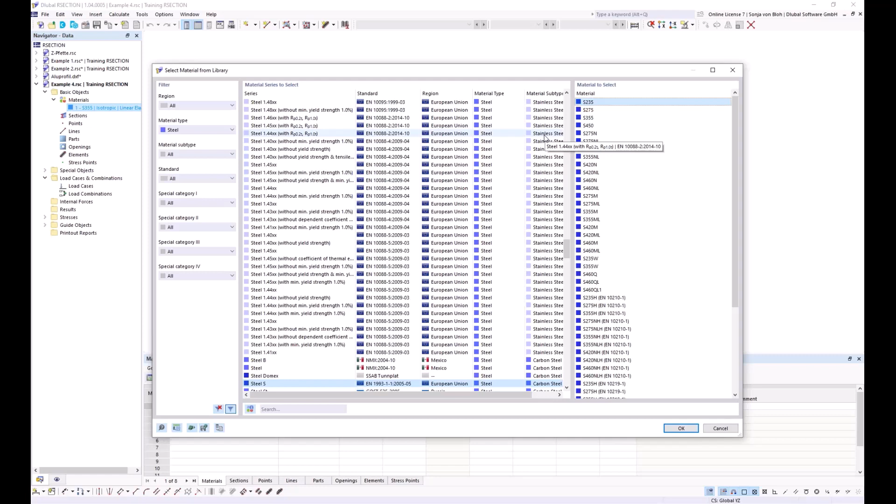I define two materials. For this, I open the material window, and for the first material, I define a steel material. This should be S235. I open the material library, choose the S235 material, and add a new material, a second material, to the list. I will do this via this button, create new material.

Then I open the material library again. I choose the material type concrete, and here I want to choose a C40/50 material. Then I click OK, and also OK.

The first material is always the reference material. In RSTAB or RFEM, however, I have the option of defining other materials.

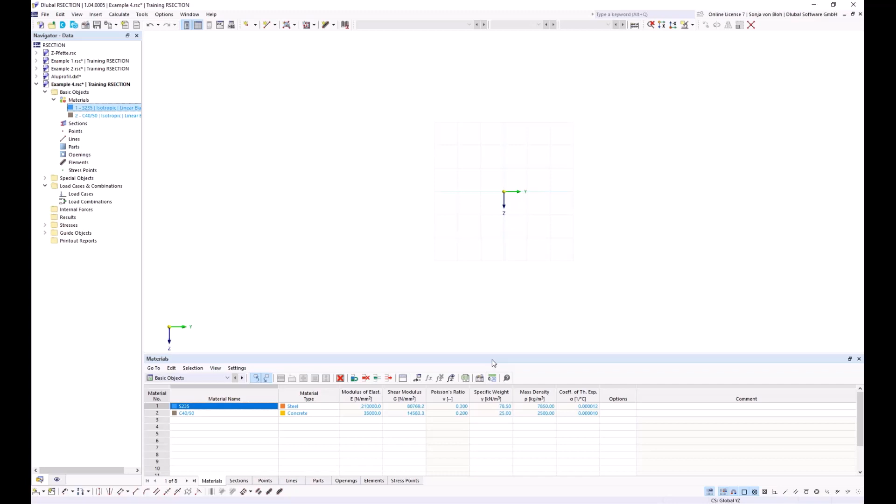First, I model the concrete cross-section with a dimension of 1000 to 200 millimeter, and I will do this via section. So I go to Navigator Data, New Section. Then I open the section library, and choose a massive rectangle cross-section.

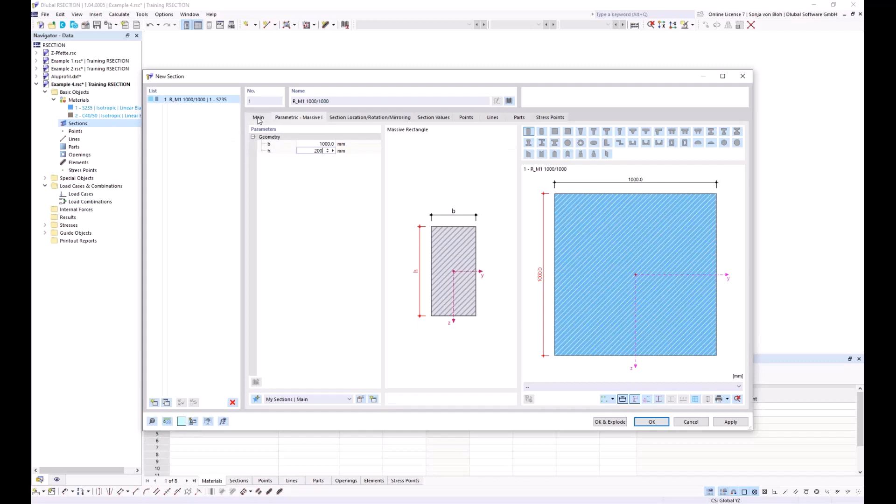Then I define for B 1000 millimeter, and for H 200 millimeter, and I define a material, the concrete material, for this. Then I click on OK.

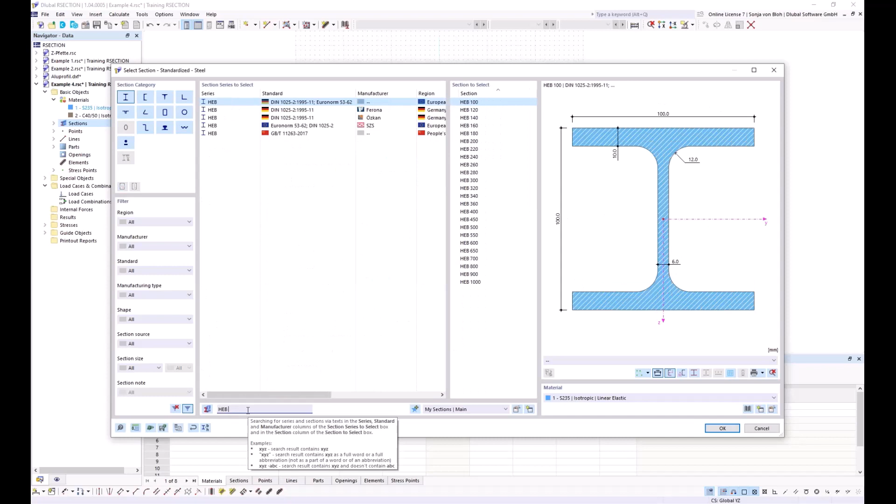Now this cross-section is inserted into the file, and I create a second cross-section. For this, I go to Navigator Data again, New Section. This should be the steel cross-section. I open the section library again, choose I-beams, H-beams, and define an HEB 400.

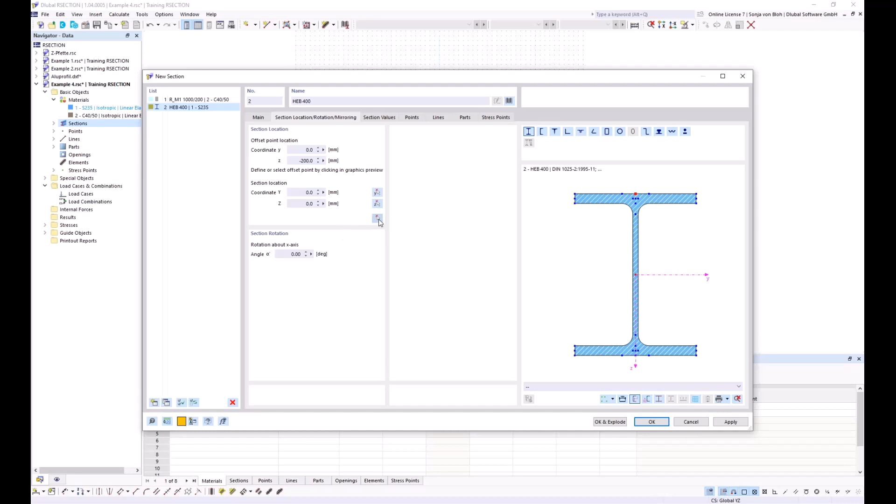I choose this one, and I choose the material S235. I click on OK, and I choose the center of the top flange as the offset point. So I click on this point in the graphics, and I choose the section location, here the bottom of the concrete rectangle.

Then I click on OK. I want to calculate also the stresses, and for this I create a new load case.

So here I go to Navigator Data, new load case, and I define the load case name M. I click on OK, and in load case M, I define a bending moment about the y-axis of 100 kilonewton meter. I now start the calculation.

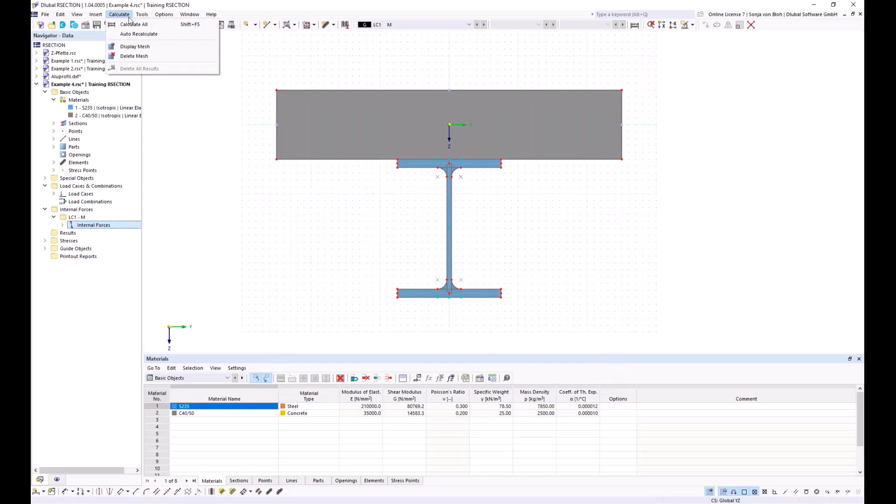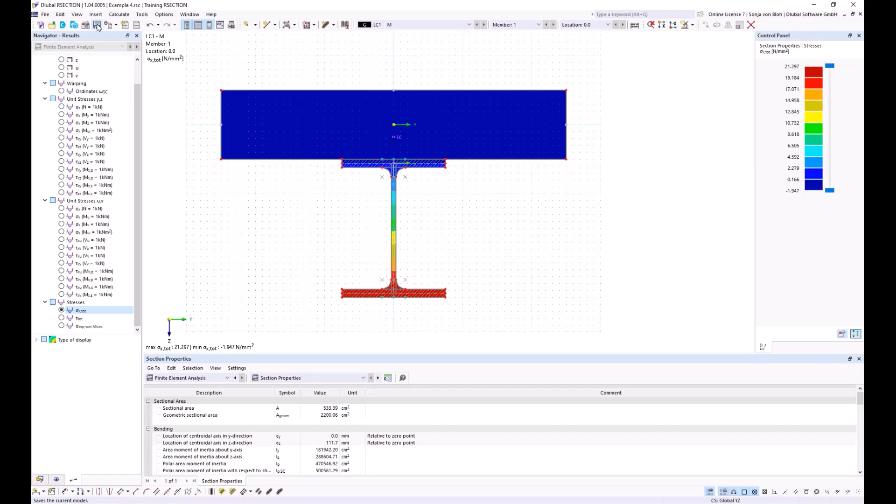I can see here now the stresses, and I would also like to show you how to import the cross-section into RFEM. To do this, I first save the cross-section, and I now open RFEM 6, and I create here a new file.

I name it example 1, and then I click on OK. Then the new file will be created.

I import the RSECTION cross-section into this file first. For this, I go to Navigator Data, then right-click on Sections, New Section, and then I open the section library, where I have the possibility to import a section from RSECTION. I click on this button, and this opens the Dlubal Center.

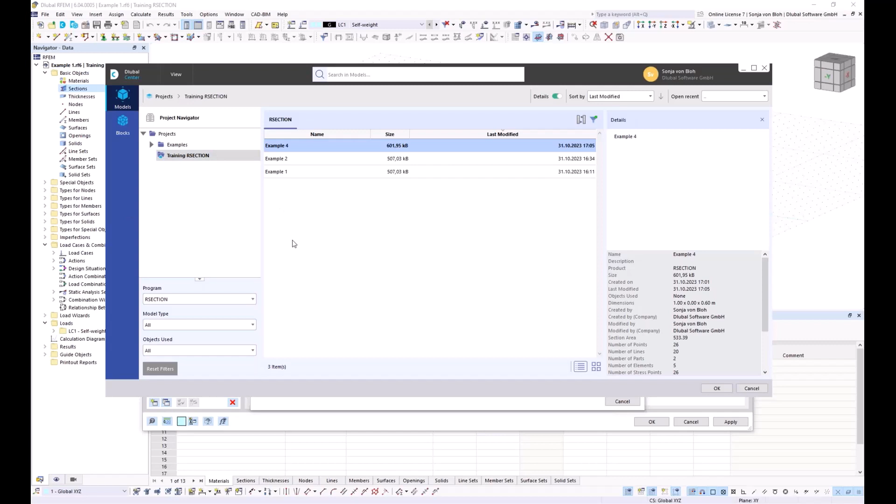In the Dlubal Center, I choose this example 4, and I click on OK. Now this cross-section is available in RFEM 6.

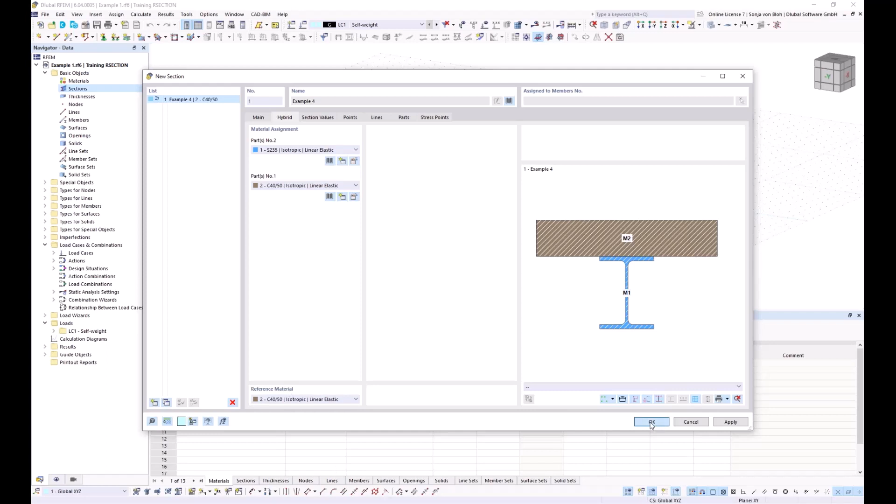I have here also the tab hybrid, and here you can see the material assignment. If you want to, you can also change the materials here for parts 1 and 2, and it's also possible to change the reference material. It's also possible to create a member with this cross-section.

To do this, I click on New Single Member. Then in tab Section, I choose this cross-section, my example 4. And then I create this member.

With this example, I have come to the end of the training. It was taught how you can create general cross-sections with graphic functions, how you can add cross-section parts to database profiles and create profiles based on a DXF import, and also how to create hybrid cross-sections.

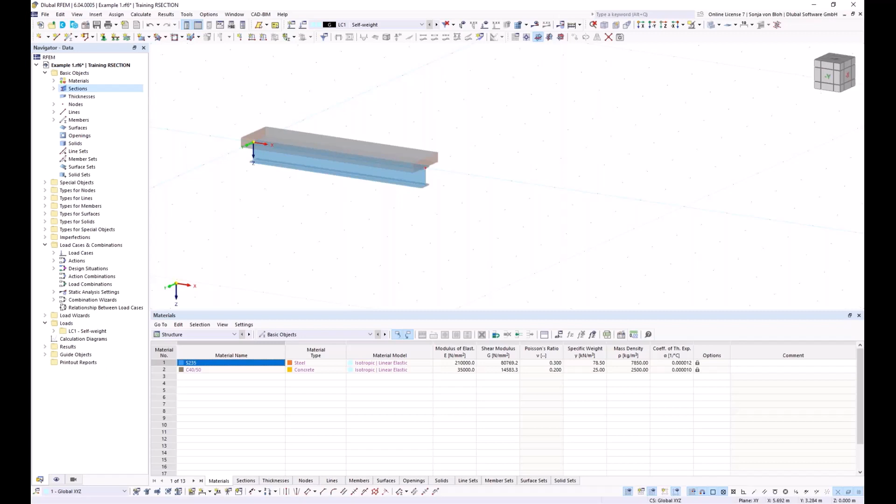Finally, I would like to show you where you can find more information on our website. You will find in tab Support and Learning frequently asked questions. You can also find here knowledge base articles, news and events, and our webinars.